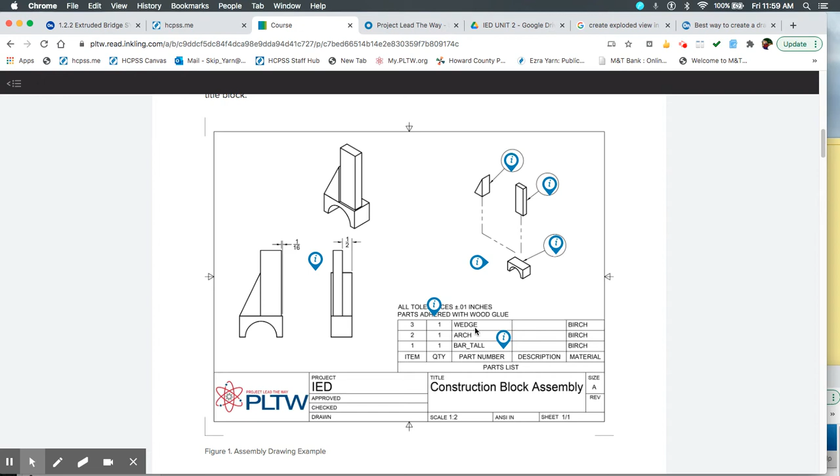Notice it has an assembly. It has an isometric view of the assembly, an exploded view of the assembly, and a parts list, also known as a bill of materials. It has the tolerance note, and that's all very important for this particular drawing.

So we're going to walk you through that. It gives step-by-step instructions as well as a lot of information, so I'd suggest reading through this. First, note that there are a couple of dimensions on here. These are assembly dimensions, not dimensions relative to the individual parts, but relative to how the parts are being put together.

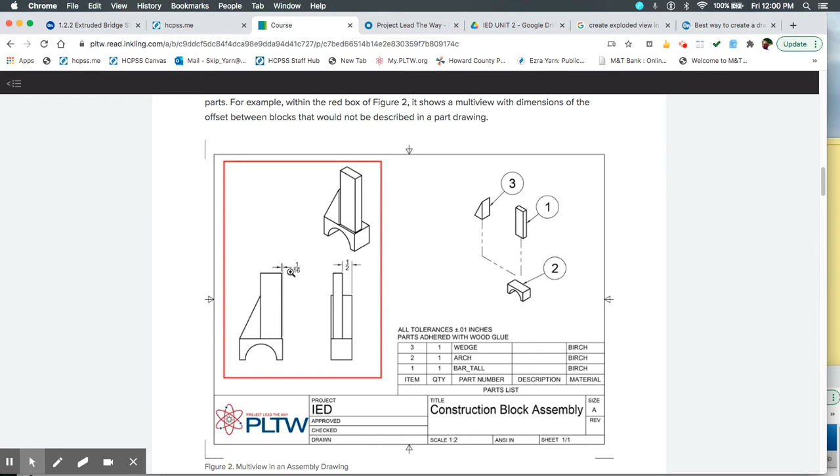The first thing we need to do is go ahead and get started on making the assembly before we do everything else. I clicked into my part studio that had one of the parts and added an assembly. So I'm in assembly mode, and I'm going to briefly go through how to make the assembly at this point.

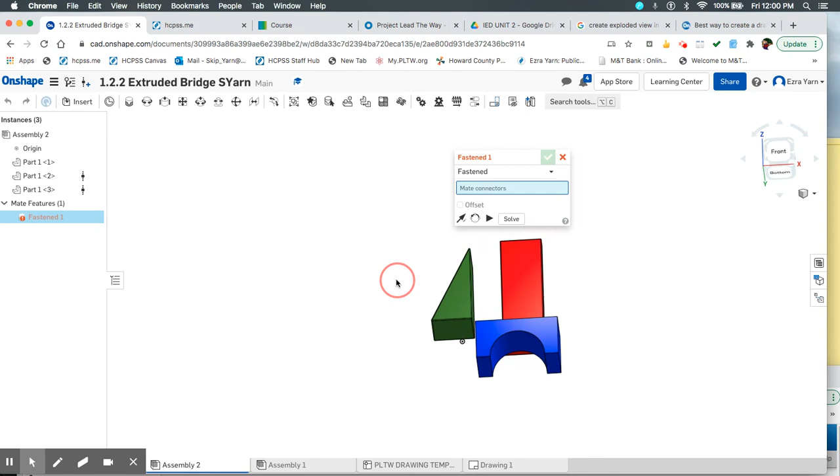I'm going to use the fasten tool, or fasten mate, and fasten this corner to the origin here. If we fasten it to the origin, it should snap. Once it snaps, we'll be okay. We can click the check mark, and we're finished with that particular fasten.

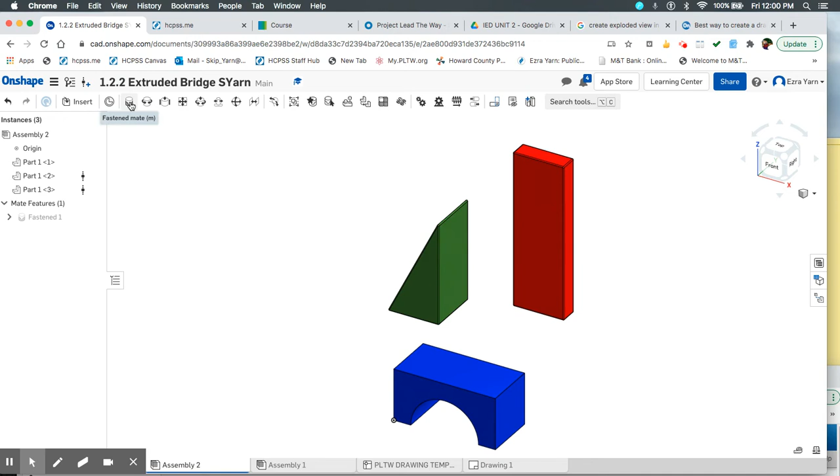Notice that it's now locked in place in space, and I'll use my view cube to line things back up again so I can continue to work. I'll continue to use the fasten mate, and simply fasten the top of this surface, then scroll over to the bottom of this surface.

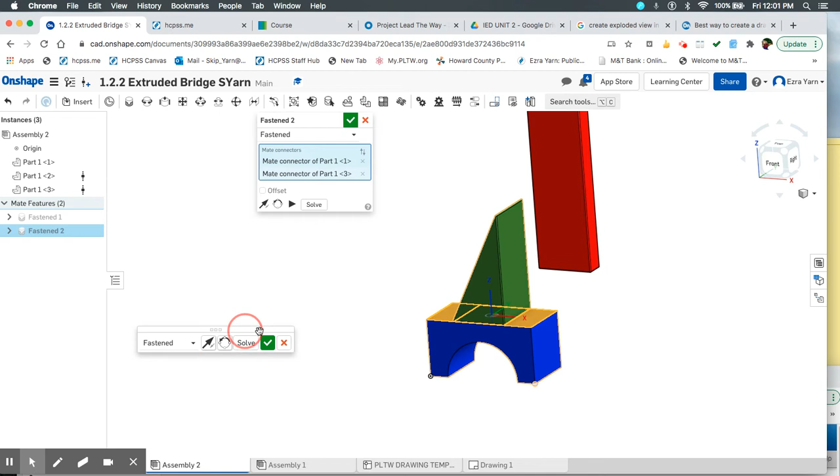You'll note that what happens here, it goes right to the middle - the middle of the two faces come together. I'm going to move this out of the way to give me a little working space. One of the problems now is that this is no longer centered - there's a space between the two. So I need to come up and choose the check mark by the offset button and offset this.

One of the things we do when we look at the offset, we look at the blue, green, and red lines. Red represents X, blue represents Z, green represents Y. It's all corresponding to the offsets here as well. It's good to note that if you go in the right direction, just like in mathematics, from the origin, that's positive, and the other direction is negative.

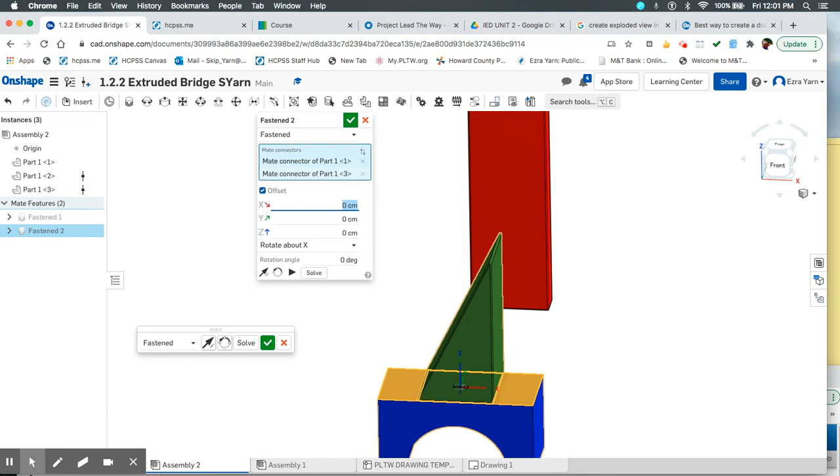I want to go on the x-axis in a negative direction, so I'm going to translate negative 1.5 centimeters, since this is in centimeters. Went the wrong direction, made a liar out of me because I worked from the backwards - we're obviously working in a different direction here. So I'm going to click and make it positive, and now we have this in the right spot.

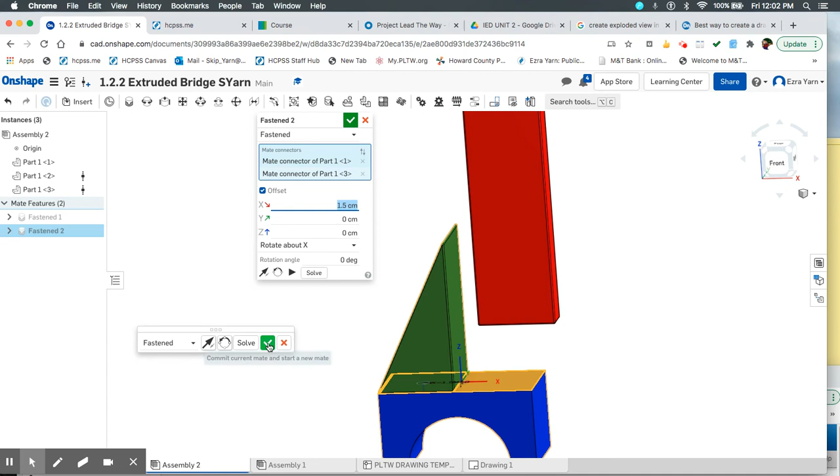We don't need to go up and down or on the Y, so we simply click solve. That particular check mark deals with that fasten. The next thing I'm going to do is continue with the fasten mode and fasten the bottom of this face with the top of this face. You'll note once again it goes to the center.

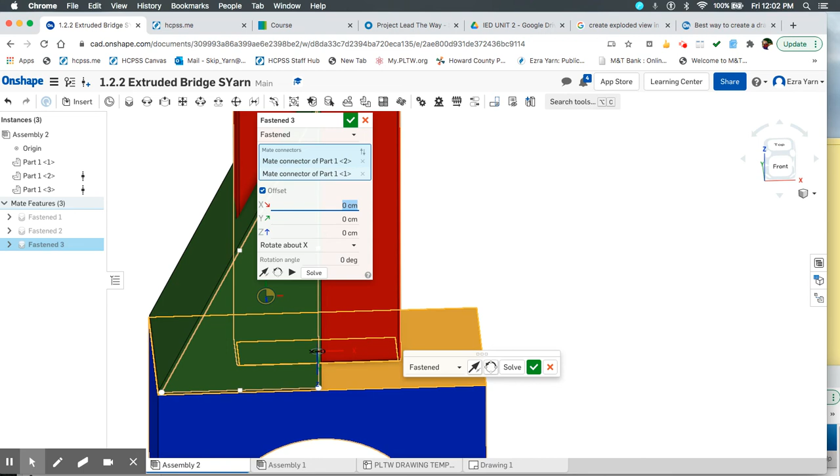That's not in the right position, so it needs to be offset on the Y. We learned last time that was in a positive direction, so this time we'll go negative 1.5. Let's see where that goes. Look at that, it goes the opposite direction - it may be based on the way the board is situated. At any rate, it looks like it's fastened there.

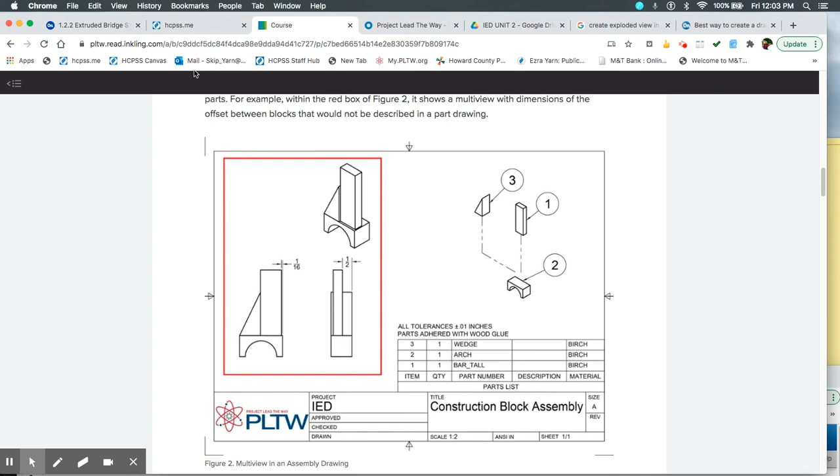However, in our assignment here, we can see this is almost to the edge, so we need to go over about half an inch in that direction. We're in centimeters as opposed to inches, so we'll make an adjustment. On the y-axis, we'll go 1 centimeter that direction and see how far it goes. That looks about right, so we'll leave it at 1 centimeter, even though for practical purposes we'll say that's okay.

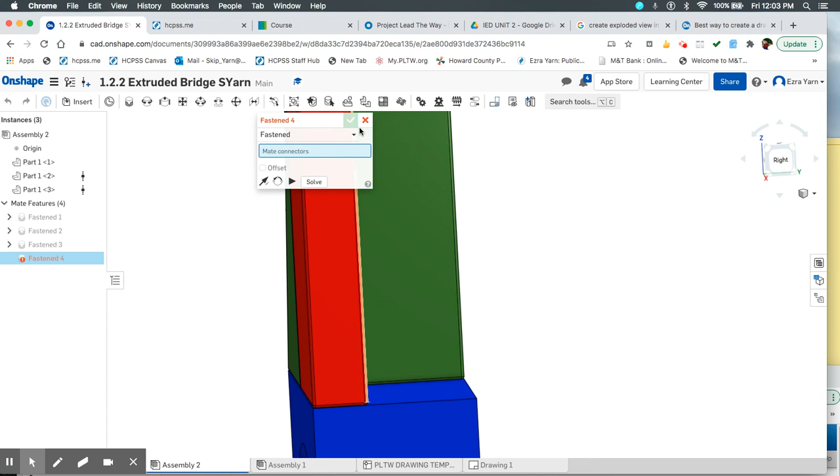So now we have this fastened correctly. We can exit out of the fasten constraint. Everything seems to be right where it needs to be - we have the 3 blocks.

One of my students asked me, how do I see those constraints? I can click on them here, and simply choose to take off the eyeball so it makes them visual and I can see those constraints. I don't want to do that, so I'll click over here to get out of that.

So we have the assembly made. Now we're ready to go and do the drawing.